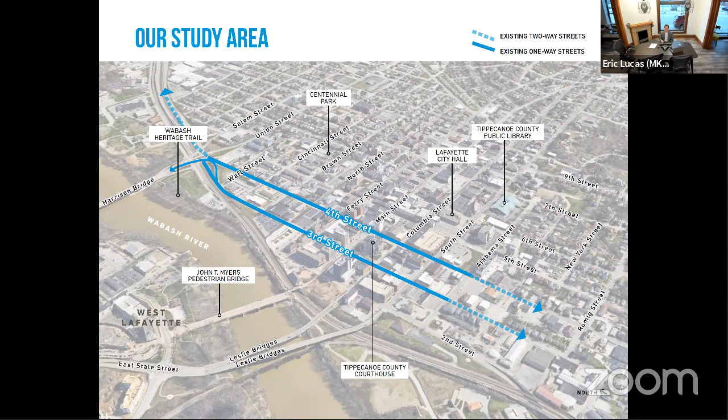As you can see, those two streets border the courthouse as well as much of the downtown streets, intersecting Main Street, Columbia Street, and South Street—really vital corridors through downtown Lafayette.

What we will be studying in this project is, as I mentioned earlier, a high-level feasibility study. We're trying to understand if it's possible to convert these two streets from a one-way pattern to a two-way pattern within that 8-block stretch. That will be dictated by a lot of the traffic implications, which we'll discuss shortly.

We'll also be looking at the conceptual configuration of the Union Street area. As you may be aware, on the north side of the city, 3rd and 4th Street sort of reconcile back, and the way these two streets eventually connect up at Union Street and north of Union Street is something we'll talk a little bit about.

And then lastly, we're going to talk about and study the short-term and long-term opportunities to create great streets—streets that support a lot of the vibrancy of downtown and what we've been able to accomplish as a community.

You may ask yourself, why should we study this? When we look at street systems across downtowns, especially cities the size of Lafayette, we understand that in downtown environments, where streets are meant to be local streets, we can really see a lot of benefits in a good, well-connected network of two-way streets.

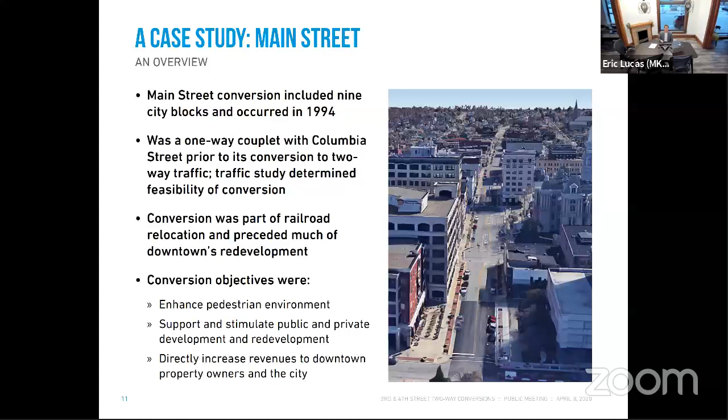Those objectives have been tracked through a third-party independent study. This independent study was conducted by the city of Fargo, North Dakota, believe it or not. Fargo was studying the possibility of converting one of their downtown corridors from one-way to two-way, and canvassed a number of different cities across the country for great examples of one-way to two-way street conversions.

One example prominently used in their study, done in 2010, 16 years after Main Street's conversion in Lafayette, was Main Street. What they found through data gathering and interviews with officials was that the success of Main Street in Lafayette...

led to redevelopment and new development of office space, new residential units and residential development, new retail along Main Street, and significant redevelopment—what we like to call infill—new buildings where there used to be parking lots or vacant sites. They also tracked direct economic indicators from that redevelopment, identifying an increase in sales taxes, an increase of retail occupancy, retail space along the corridor, higher occupancy rates there, as well as for office space, and higher rental rates for those who own buildings in downtown.

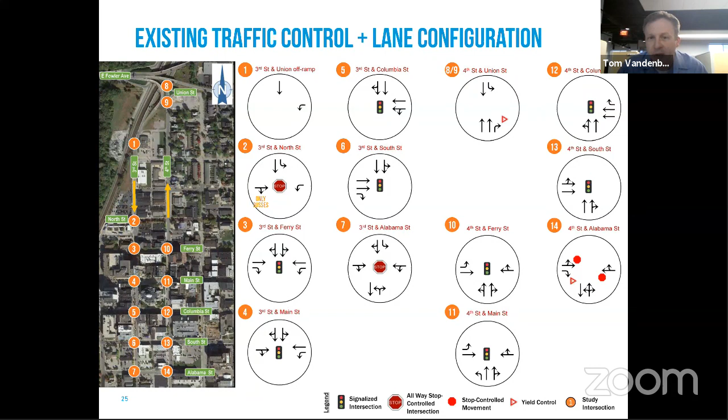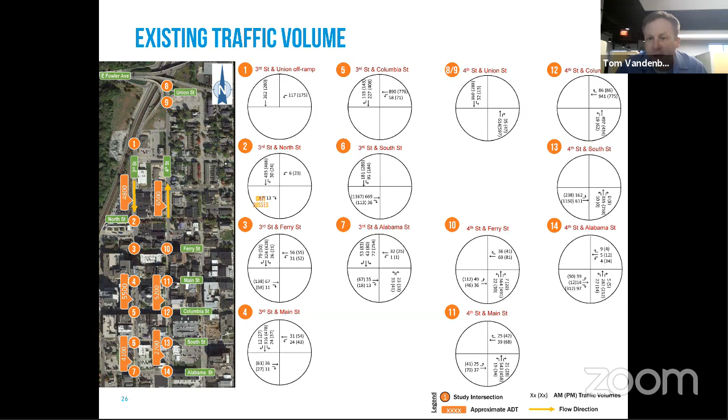We've also collected existing traffic as part of this. Eric, if you can change to the next slide — we've actually already collected the existing traffic for the study. I want to clarify that we collected this traffic long before the current shelter-in-place order for the state, and more importantly, before Purdue's spring break.

At that time, students were still physically going back to school — they had yet to convert to online classes. So we collected the existing traffic when the patterns were still representative of what we all know them to be. When we collect traffic, we typically collect it in the morning peak hour and the afternoon peak hour, known as rush hours, typically 7 a.m. and 5 p.m. From that, we can also estimate the daily traffic over the course of the entire day.

We've also looked at daily traffic counts, historical counts for the area. The key thing I want to point out from this slide — I know some of these numbers at the intersections are hard to read — is to look at the numbers in the boxes on the aerial, pointing to the roadways. The typical daily traffic, the 24-hour traffic over a typical weekday, ranges from roughly 2,700 to 6,500.

The reason I point those numbers out is that a typical two-way road with one lane in each direction — two total travel lanes, two-way traffic — can typically handle roughly 12,000 to 17,000 cars per day. In any given segment of either 3rd or 4th Street, the highest volume I see is 6,500. So that's today's traffic, and a two-lane road can typically handle 12,000 to 17,000 cars. We're pretty confident that when we convert these to two-way traffic, they can handle the existing traffic.

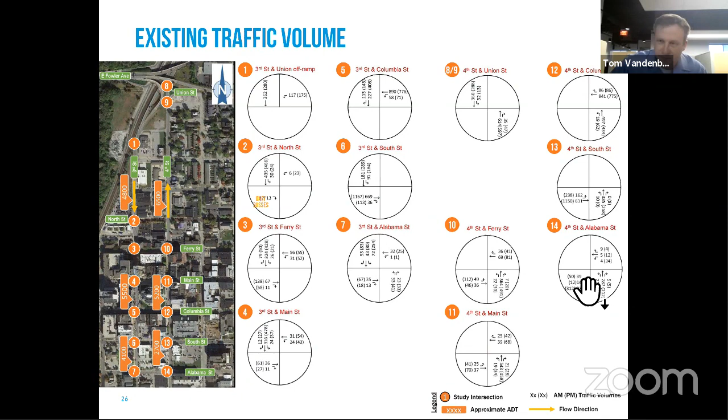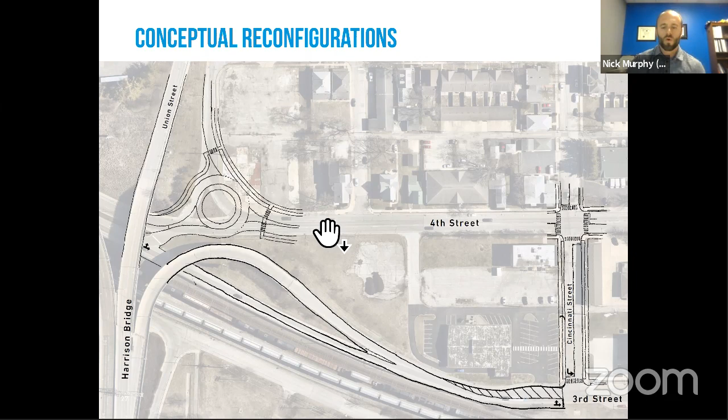We'll vet all that as we work through the traffic analysis. That's something that's not shown, but we think is going to be very feasible. As we move toward the south end of the project, as Eric mentioned, Alabama is at this time thought to be the southern end of this project. The reason is 3rd and 4th Street, as I'm sure everyone knows, is two-way traffic to the south. So it's a common sense point to draw the line and make that transition.

All the concepts we're looking at are low impact, economical, what makes sense, but also trying to achieve the goals of the project—complete streets and a conversion of two-way traffic—in order to achieve all the goals and positives that Eric mentioned earlier.

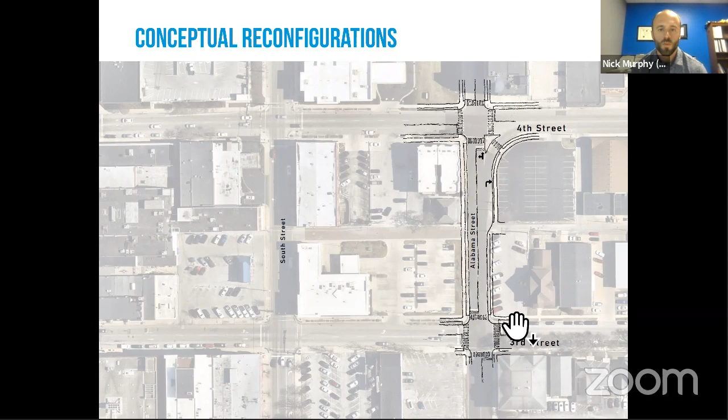And Eric's going to talk a little bit more on the complete streets approach that we're going to take along 3rd and 4th Street. Yeah, thanks Nick, appreciate that.

When we talk about complete streets, I think what we really mean is streets for everyone. I think the city of Lafayette has done an absolutely great job installing streetscapes along a number of downtown streets that reflect a lot of the goals we seek to achieve when we talk about complete streets. These are livable streets that encourage the type of vibrancy, encourage retail and commercial uses on the ground floor, and residential development as well in downtown environments.

It also accommodates bicycles. In this case, the bicycle facilities are sharrows on the street, so these are on-street bike facilities along Main Street. There are sidewalks that are wider and filled with amenities such as benches, trash receptacles, street trees, and public art. These sidewalks connect into buildings. A lot of the ground floor uses along Main Street are very active—lots of merchants and restaurants and other commercial uses that create a great sense of activity and energy along Main Street.

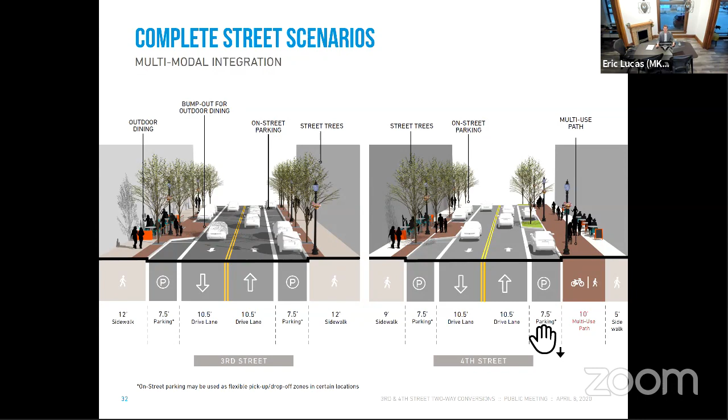Both scenarios, this one as well as the one on the previous slide, work within our existing right-of-way, which is constrained. So we're not looking to expand right-of-way to make these scenarios happen. Of course, these are very preliminary. They require a lot more study, but we wanted to give you an indication of what we mean by complete streets, and some visuals of what we mean by these ideas.

Of course, Main Street is a great example. But when we talk about bump outs for outdoor dining spaces, most of you are probably familiar with the bump out at East End Grill, where the sidewalk bumps out, but the outdoor dining is up against the actual business.

That's the same as what is happening at the Lafayette Brewing Company. Now, we can do that in a permanent fashion, like what's been built at those two businesses, or we can do that in a temporary fashion if a business wants to test out an outdoor dining area or a bump out, with planters or fencing that separates those areas from the travel lanes. There are many examples around the state and country where temporary outdoor dining areas are installed to test the idea, or to use it seasonally, so that when winter arrives, that area is repurposed as a parking space.

So these outdoor dining areas can be done in a permanent fashion or in a temporary fashion. In both scenarios, temporary or permanent, they are done by taking parking space to do a bump out.

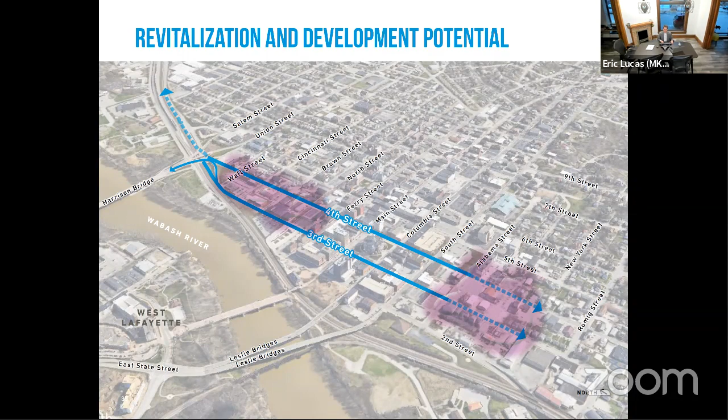So, just in summary, the significance of converting the two corridors: as you can tell, our office is on a very vital corridor here along Columbia.

There are lots of significant benefits of converting one-way streets to two-way streets. We mentioned those throughout the presentation: improving access to downtown businesses so people don't have to go out of their way to get where they want to go, providing additional options for turning and moving throughout downtown, making left and right turns available for motorists, improving safety for all users - cars, bicyclists, pedestrians - expanding the success of Main Street to these other corridors, growing the downtown north and south along these two corridors, and improving connectivity to those neighborhoods. Those all come together to contribute to a great, livable, vibrant downtown, really expanding the legacy of what we've accomplished along Main Street.

So with that, I want to close and tell you our next steps. First, we're going to collect all the questions rolling in from you this evening. We appreciate your participation. There are two ways to ask questions: one, as you're doing now, or through email to A. Kowalski, that's A-K-O-W-A-L-S-K-I at mkskstudios.com. Ask those questions and we'll collect and distribute answers via the two portals we mentioned earlier.